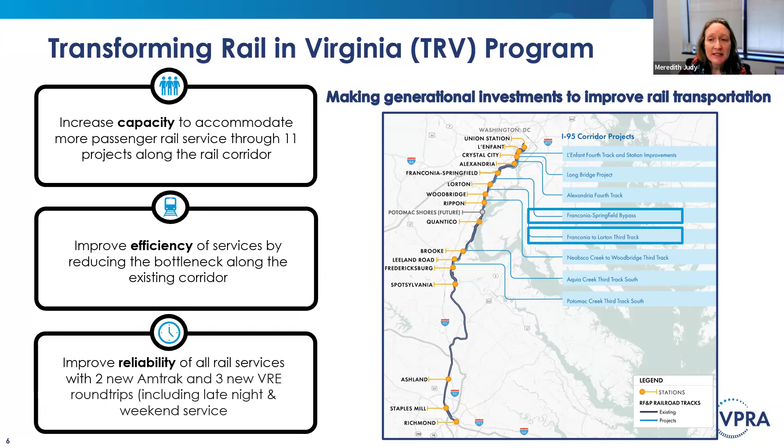VPRA is leading significant rail construction projects across the Commonwealth. The focus of our work right now is on 11 major upgrades between Washington, D.C. and Richmond, Virginia. This will dramatically improve Amtrak and Virginia Railway Express service, meeting our goals of improved capacity, efficiency, and reliability. Next slide.

And Virginia Railway Express is a long-standing commuter rail service in our region, offering service on two routes, one west from DC to the Manassas Broad Run area and one south to the Fredericksburg, Spotsylvania area. And VRE currently offers 16 daily trains on each line, but we will be seeing improvements and more frequency as the VPRA projects come online. So let's dive into our construction project updates. Sarah. Thank you, Meredith.

So with the Fairfax County projects, this map here is just an example of the different projects that we have currently going on in this area. There are three main ones. We have the Franconia to Lorton third track, which adds that third mainline track along the corridor. It's one of the most traveled areas currently between Washington, D.C. and Richmond. And it's really key to helping to alleviate some of the buildup of trains we have and concerns we have with train traffic that we see today.

We have the Franconia Springfield bypass, which is a rail bridge that will allow passenger trains to cross over the existing freight tracks and will also serve passenger platforms on both sides of the tracks. And then we also have the updates to the Franconia Springfield VRE station in conjunction with these projects, which will include both longer platforms and a new pedestrian tunnel. Next slide.

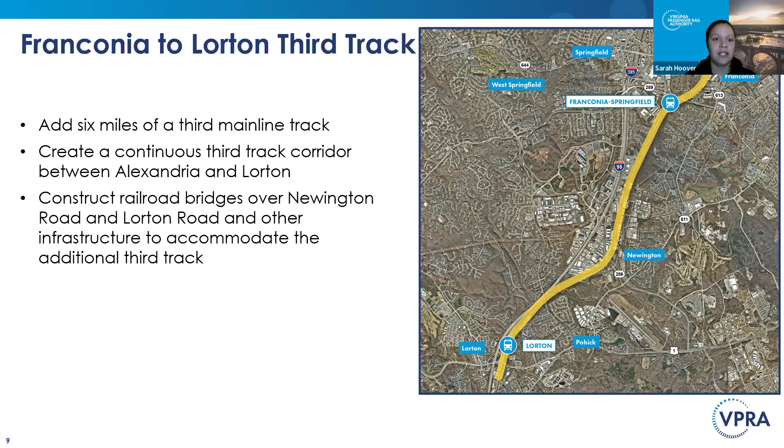So in line with that bridge construction I mentioned earlier, there are also two other locations where we will be seeing main bridge improvements along the third track. As I mentioned earlier, there's Newington and Lorton, and then we have Accotink Creek and Pohick Creek. Both Newington and Pohick will be receiving a new railroad bridge adjacent to the existing railroad bridge, and we'll also be removing and replacing the entire existing railroad bridge in those locations. At Accotink and Lorton, we will just be having the construction of a new railroad bridge adjacent to the existing one. Next slide.

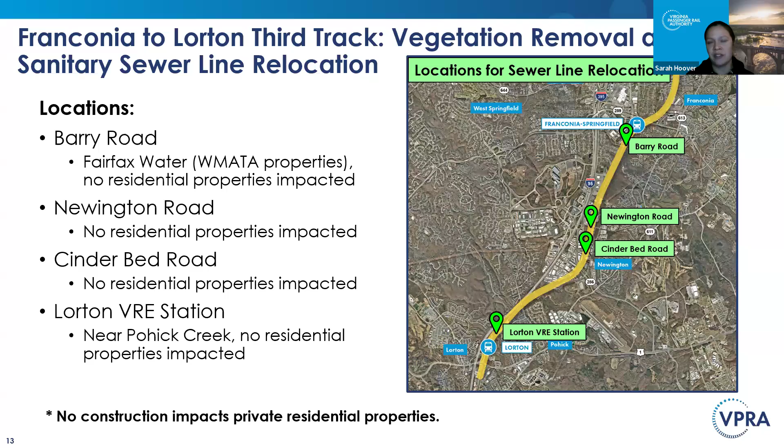When the slide says no residential properties impacted, what I want to make clear is that's in regards to the construction. So while you all may be seeing, from a residential standpoint, trucks coming through for work and access and things like that, the physical construction of these relocations is not going to be occurring on private properties. All of the properties that have been affected have already been approached in regards to acquisition and such. So if you haven't heard from us, you're not being affected by this project for the purposes of right-of-way acquisition. Next slide.

So in regards to the third track, so swapping back to the other project related to rail, we're currently looking at access points that we have under consideration. What I would like to point out is all these locations are not the only locations. These are just general locations that we're currently looking at along the corridor in order to access our project. So currently we're looking at Gunston Cove Road area, Lorton Market Street area, Lorton Road, Lorton Station Boulevard, Pohick Road, Cinder Bed Road, Terminal Road, and Newington Road and Barry Road.

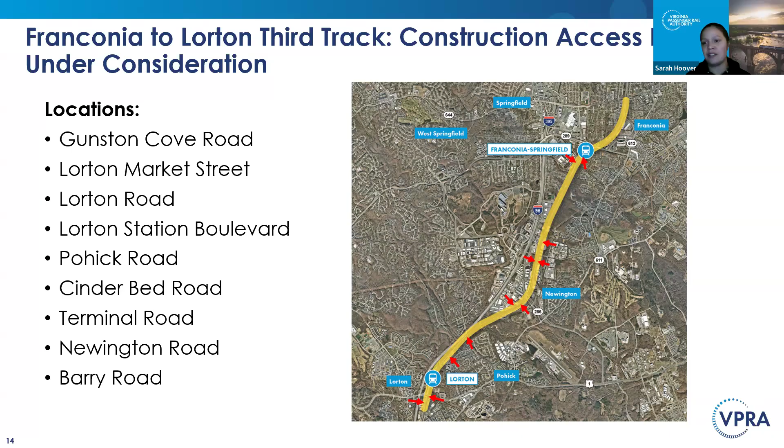So as I mentioned, these are not the total list. These are just particular areas that we're looking at as part of that access. So what that of course means is once the track or construction begins, you may begin to see some truck traffic or construction traffic related to that. I will say they won't be all happening at once. This is a phased project. So not all of these locations will be accessed simultaneously. It'll be dependent on the phase of the project we're in. Next slide.

So as I mentioned earlier, in regards to what is an interlocking, it's a rail junction where these tracks or these main lines merge and they split to allow trains to move from one main line to another. So we're installing these turnouts or crossovers, which we've spoken about previously in other CAG meetings, to allow for interoperability between the main lines. This is a specific location where that is meant to occur. In regards to why this is important, this is key for safety improvements, for operational efficiency.

As part of the third track and the bypass, the Ravensworth interlocking would no longer be a possible location for an interlocking. But of course, an interlocking was necessary for this area. So it needed to be moved north, which is where you have the new CP Beltway. And to that point, it was a part of the shoofly construction that will be needed for third track as well. So in regards to when this is happening, the track work is currently underway, and we hopefully will be seeing it completed at the end of March. Next slide.

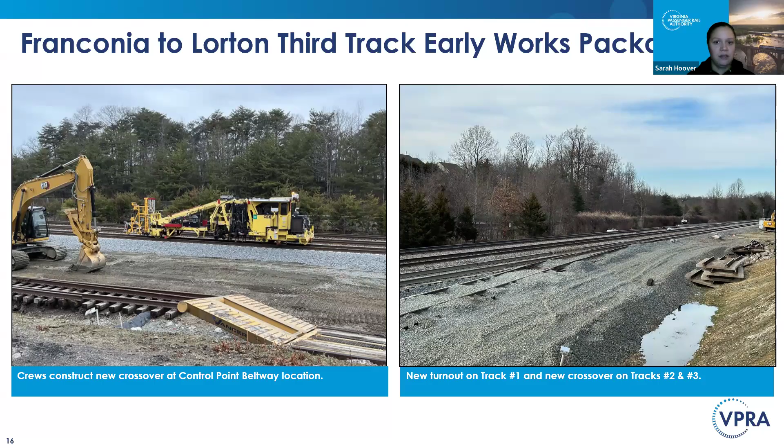And then to the right, we have closest to us, sort of closest to the bottom of the image, the new turnout on track 1 or main 1 that's been installed. It's harder to see, but on that far side, where you can see the concrete pad there, the little square in the distance, that is where a new crossover has also been installed between main lines 2 and 3. Next slide. I'll hand this over to Adil.

Thanks, Sarah. So the Franconia Springfield Bypass Project constructs a bypass rail bridge, which is pretty much a rail flyover going over the existing CSX tracks. And that's what we're building right now. We're out there constructing. And the whole goal is to reduce bottleneck and delay. So we're not waiting to switch tracks like Sarah was mentioning. We're just going to go over the CSX tracks here.

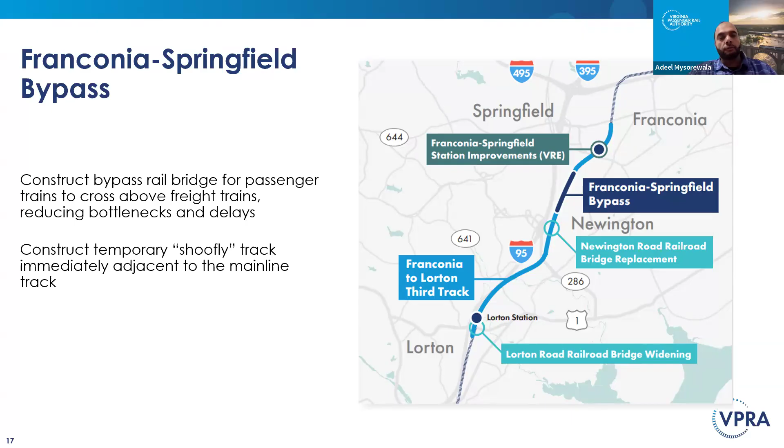As part of this project, we're also constructing a temporary shoofly, which we kind of talked about at our last CAG meeting, but just a quick reminder, it is basically a small detour on the site so that we're creating more space for crews and equipment to do the work on site. So next slide.

Just a couple of renderings that show the flyover bridge, which shows a VRE train going over a CSX train. Basically, that's VPRA's track going over CSX's track right there. Next slide.

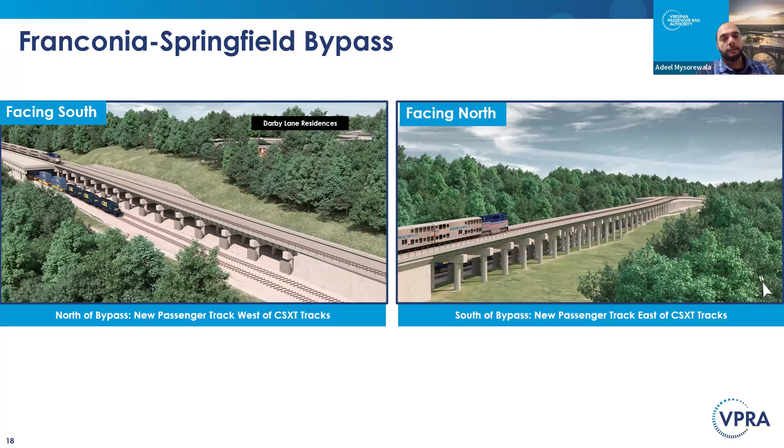So the key bullets are, we received our construction general permit for our entire site. Basically, once we got our final plans complete, we got a construction general permit. And a CGP basically allows us to manage stormwater. We need to install erosion, sedimentation control, et cetera, to manage stormwater release on the site. And I'll show you some pictures of that later on.

And like I mentioned, construction is underway. If you live nearby, you've seen it happening. So recently completed, we've completed the 2 temporary railroad crossings that allow us to cross from east to west. We did some additional borings on site to finalize our design walls during construction. Permitting, like I mentioned, is complete, and then property acquisition is complete as well.

What we have ongoing right now, we have temporary drainage being installed, grading for site access. So with these new properties, we have some additional site access locations, and I'll have a slide that touches on that later as well. Equipment delivery and staging is happening right now, and installation of erosion sediment control, and then retaining wall construction, primarily excavation going on right now. And we're also working at night as needed. Night work is because that's where we have more opportunity to get more work done because there's less train traffic.

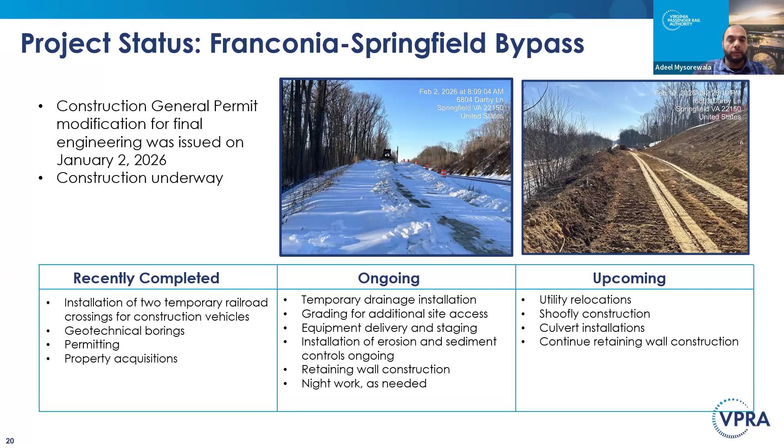What's coming up next? Utility relocations are going to start very soon. Shoofly track construction is going to be coming up soon. We have some culverts that we're installing, and we're going to continue the retaining wall. You'll actually see walls getting built out there in the next couple of weeks. Next slide, please.

So just some pictures of what's going on. On the left, you can see the retaining wall 4A excavation and grading going on. So we have an excavator out there, basically getting the hill ready for our wall. Temporary drainage installed just to make sure drainage is operating while we're doing construction and moving dirt around. Next slide.

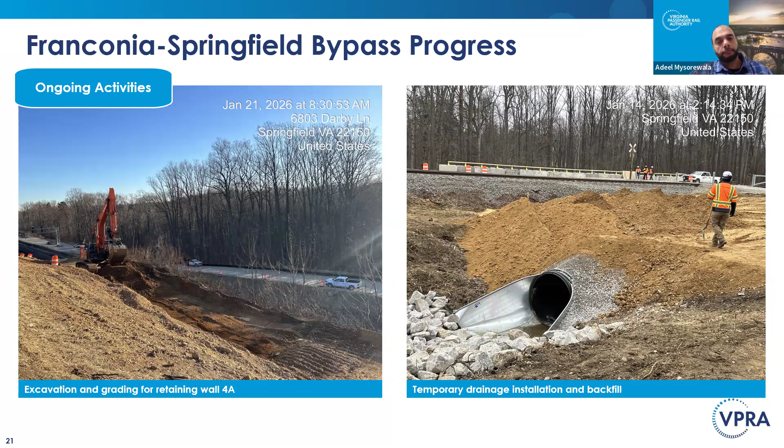And like I mentioned, erosion and sediment control is part of our CGP permit, or construction general permit, basically installing silt fences and other controls like construction entrances, inlet protection, sediment traps, just to make sure we manage stormwater when it rains, all the snow melt, all that water and silt that's generated. And the goal is to prevent soil loss and pollution entering waterways.

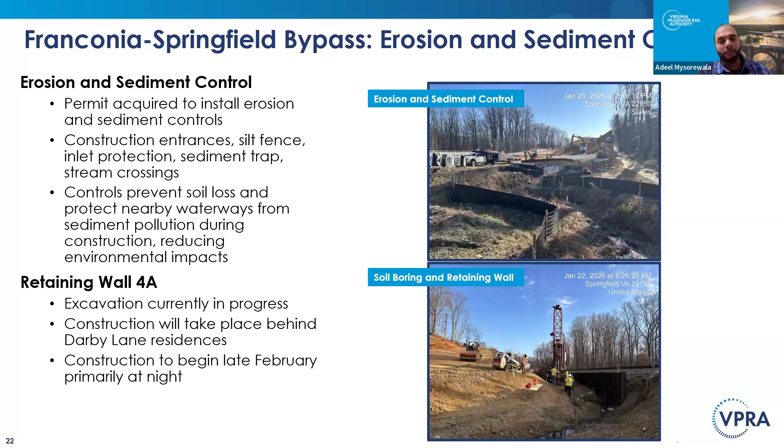On retaining wall 4A, on the previous slide, you saw the excavator working. We also had a boring rig out there doing borings. Retaining wall 4A is directly behind the Darby Lane residences. So you've seen our equipment working out there, and they will continue to do that. We're already in late February. It's going to continue all the way to spring is our expectation, the next couple of months for now. Next slide, please.

So I mentioned construction access points. We have some additional properties that we just received, so our crews are out there building access from those locations. These cyan arrows show you those locations. So we're not going to be just coming down Berry Road. We'll have other points of access and be using those very soon. That gives us several locations where equipment can enter and exit for construction. Next slide.

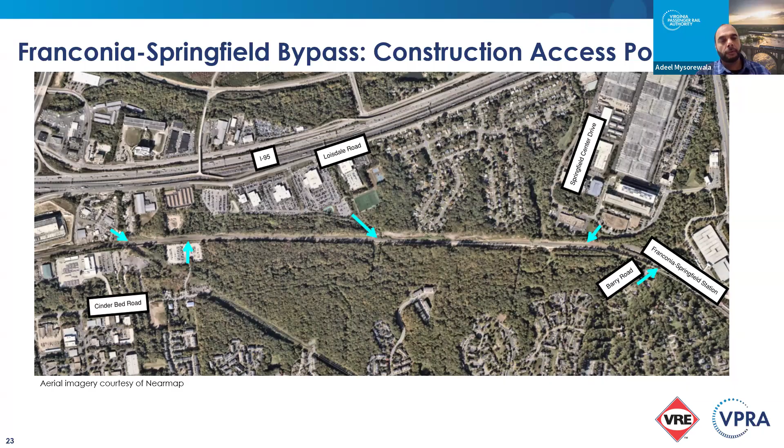Obviously, like I said, construction is ongoing, so there will be some disruption due to construction. Primarily right now, it's trucks entering the site, bringing material, taking the excavated material off site. You'll hear noise near the tracks, work occurring at night. Excavators and bulldozers are working out there, not a lot of jackhammering and drills. We've tried to limit that, but there will be occasional jackhammers and drills working out there. And most of the in and out is going to be trucks and dump trucks on site. I think that's my last slide.

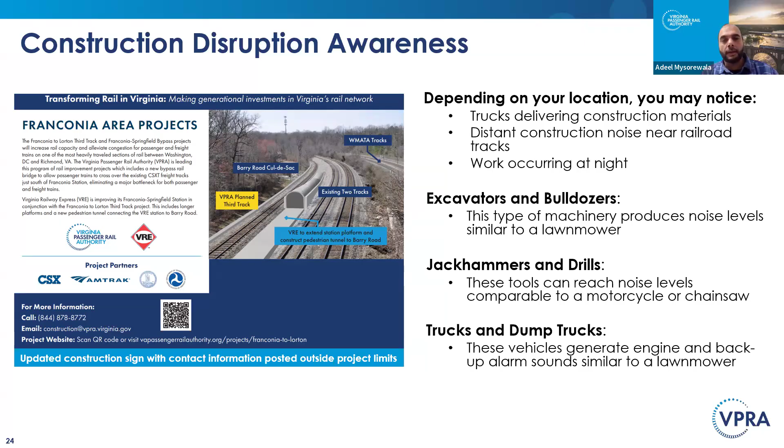All right, on to me. Thanks, Adeel.

So, update on the Franconia Springfield VRE Station Improvements Project. We are effectively complete with design. We circulated a 100% design package at the end of the calendar year, and we received comments back on that from various stakeholders with VPRA and CSX and others. We're working through the comment resolution phase, looking to get the plans finalized. We already have our construction manager on board and ready to oversee construction. We are working through the permitting process with Fairfax County.

Those permits are submitted and under review, and we're coordinating with VPRA and with WMATA and other parties to make sure that we have all of the necessary property interests in order that we can perform the necessary work. The vast majority of our work is within the railroad right-of-way, just a small section where our access point comes back out to Barry Road at the cul-de-sac that we'll need to just make some modifications to our footprint there, but not on any residential properties, only impacting publicly owned properties there.

Upcoming, we'll look to have our plan set completed and ready for an invitation for bid in probably mid 2016, or 2026. 2016, I guess that would be nice. In 2026 here in the middle of the year, looking to start construction at the beginning of early 2027. Next slide, please.

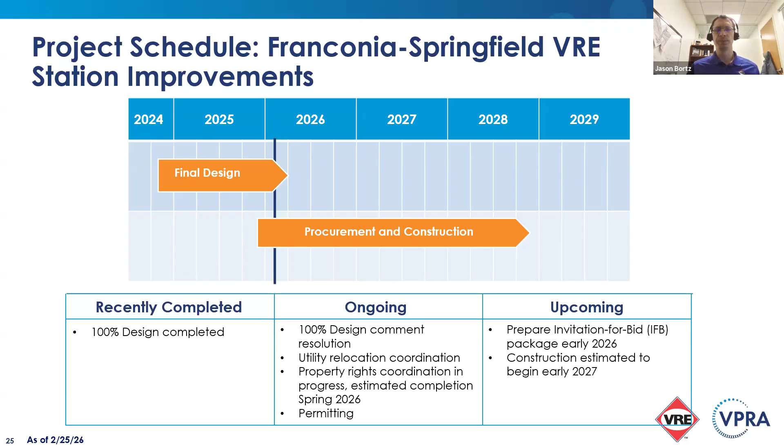So just kind of a reminder of what the project includes. Right now we have 2 platforms out there. One platform is very short, can only open about 2 doors. Our typical train sets are 6 or 8 cars. So we'll be looking to lengthen the platforms to ensure that we can open all 8 cars. That allows us to get everybody on and off the trains more quickly and get back to heading on to the next station.

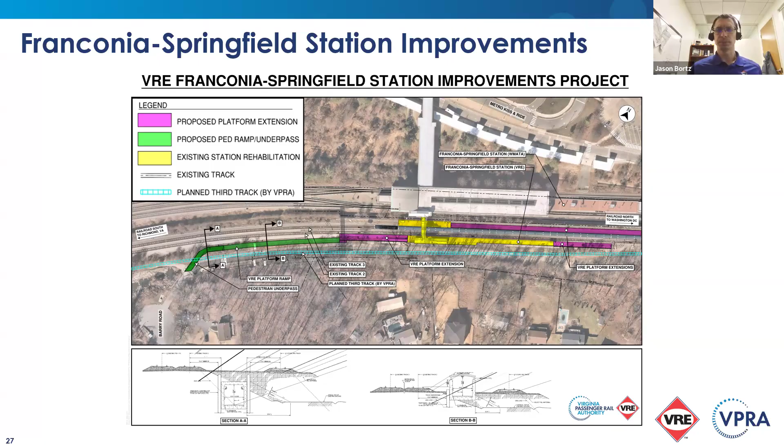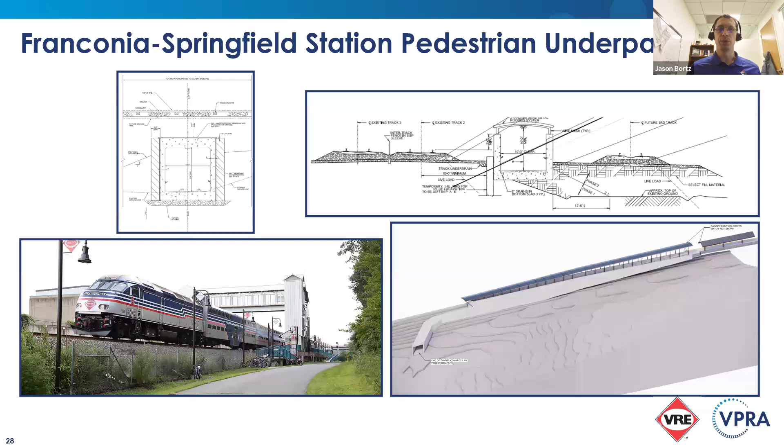At the bottom of the screen, what you could see is kind of how that tunnel transitions from being very low on the bottom left image, where it's significantly below the ground line, into more of a U-shaped box with a roof on it as we get up closer to track level. Next slide, please. And this is just another visualization of exactly that, how the tunnel starts well below grade, starts underneath the track, and then progresses up towards the platform. I think that's it for me.

All right. Let's talk about the Long Bridge project and some service going on. Construction has started on the Long Bridge project, which of course is just north of here, and we're excited about getting underway. And with that construction, Amtrak and VRE have made temporary service adjustments. So we're evaluating those schedules as the project progresses on the Long Bridge. Our work windows and service adjustments began back on January 12th, and we're going to continue those until the project's completion in 2030. They may change, they may stay the same, but that's something we are monitoring throughout the project life cycle and the construction process for Long Bridge.

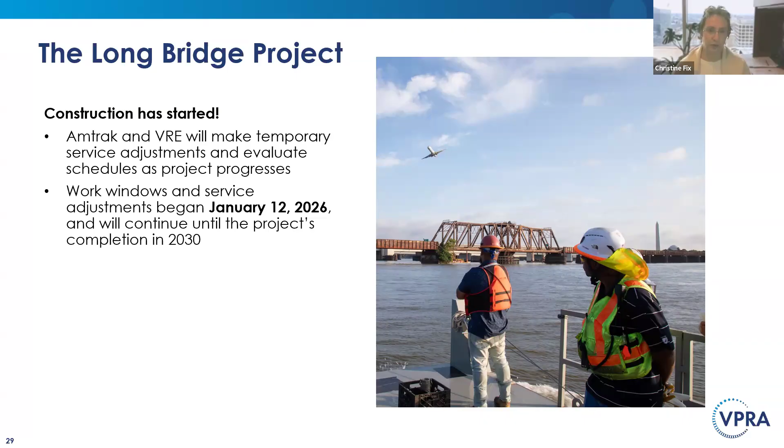Next slide. What do those service impacts look like? Well, our objective was to develop a service plan for Amtrak and VRE trains for up to 5 years, beginning in January, to maintain maximum service and performance for Amtrak, VRE, and CSX trains. We needed to maximize work window productivity, meaning we needed to give our contractors the most time on the track and the rail as possible while being safe and making sure those employees are safe.

What are our constraints? We've got some big noise constraints. In DC, noise and vibration laws are pretty restrictive and restrict significant work to daytime hours, Monday through Saturday for Long Bridge North. And this picture is that section of track that we're talking about.

Because of the tight corridor in this area, we cannot have trains going by while construction workers are working actively on the track. So how did we plan for this? We looked at all of the peak ridership times, specifically VRE AM and PM peak, and those were the highest ridership times.

We worked with Amtrak Northeast Corridor at Union Station, which also requires some service considerations we had to think about. And then we noticed Union Station in DC is the most congested in the afternoon. So the afternoon timeframe was limiting for construction activities. We also had to take into account things that are outside of our area. We had to understand what was affecting Amtrak Virginia, Amtrak long distance, trains running south, trains running north, as well as VRE.